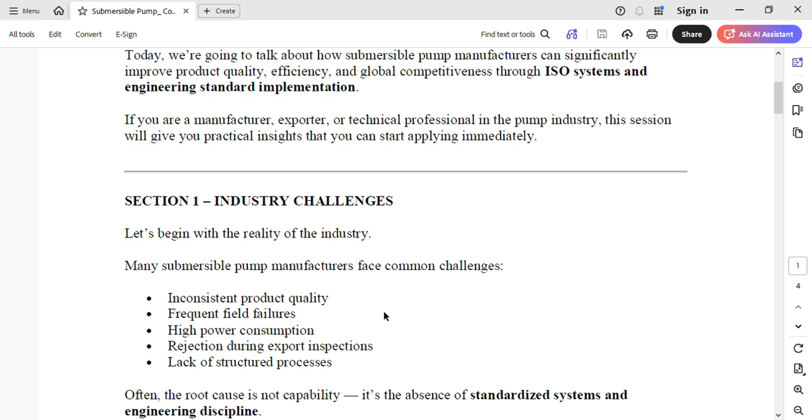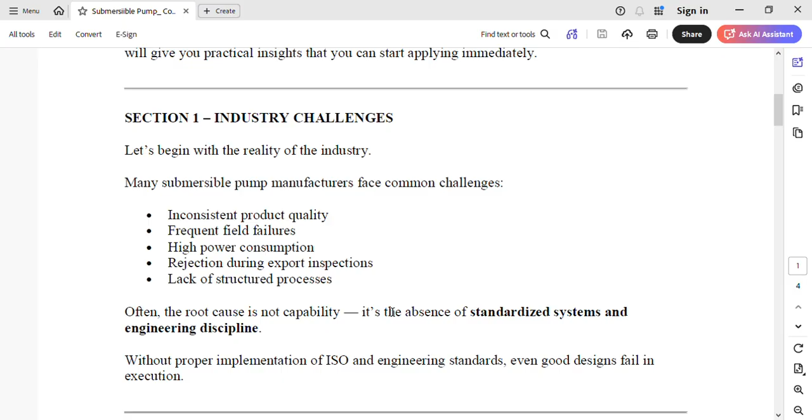Section 1, Industry Challenges. Let us begin with the reality of the industry. Many submersible pump manufacturers face common challenges: inconsistent product quality, frequent field failures, high power consumption, rejection during export inspections, lack of structured processes. Often the root cause is not capability, it is the absence of standardized systems and engineering discipline. Without proper implementation of ISO and engineering standards, even good designs fail in execution.

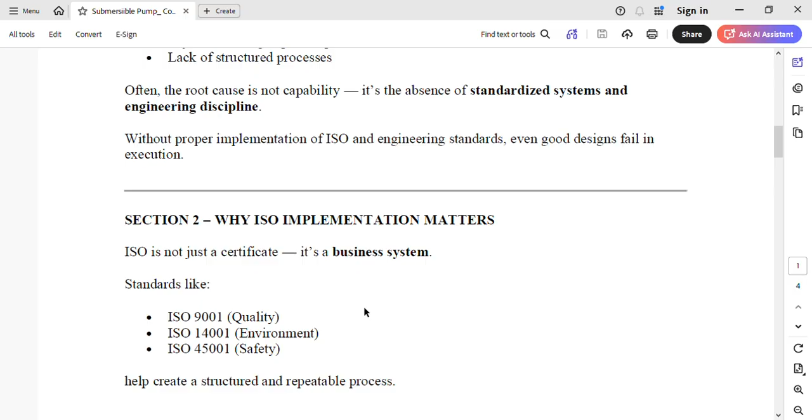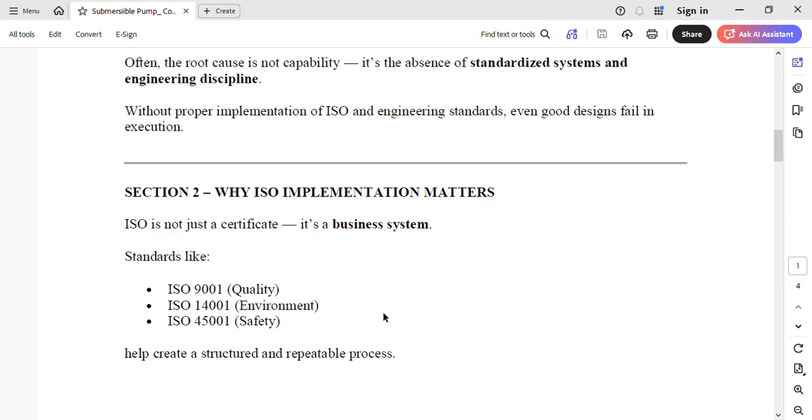Next is why ISO implementation matters. ISO is not just a certificate, it is a business system. Standards like ISO 9001 quality, ISO 14001 environment, ISO 45001 safety help create a structured and repeatable process. Key benefits include process consistency, reduced rejection and rework, better supplier control, improved customer confidence. For exporters, ISO compliance is often a market entry requirement.

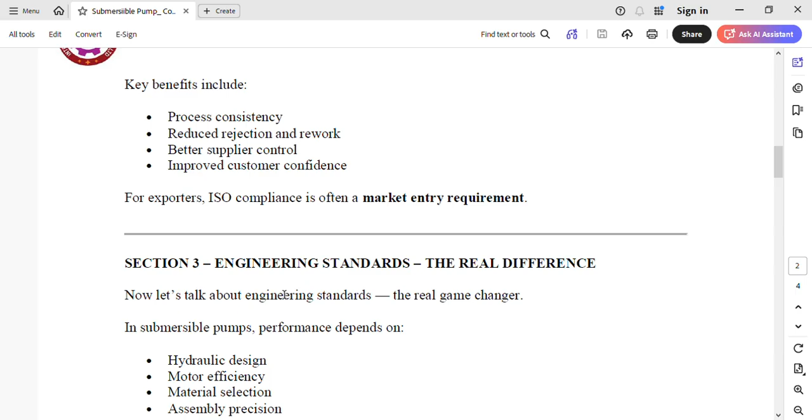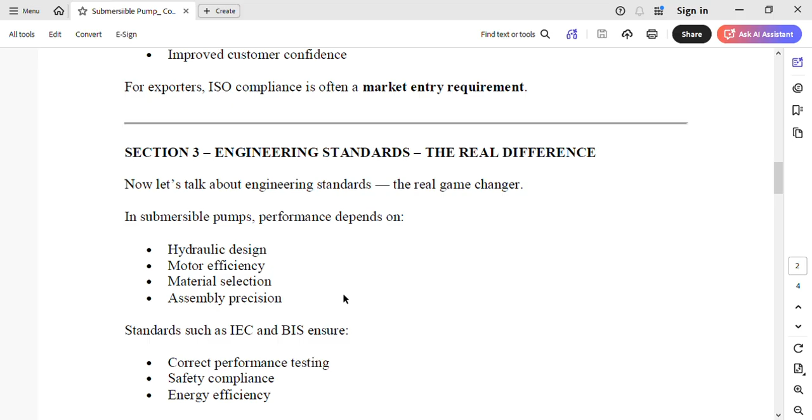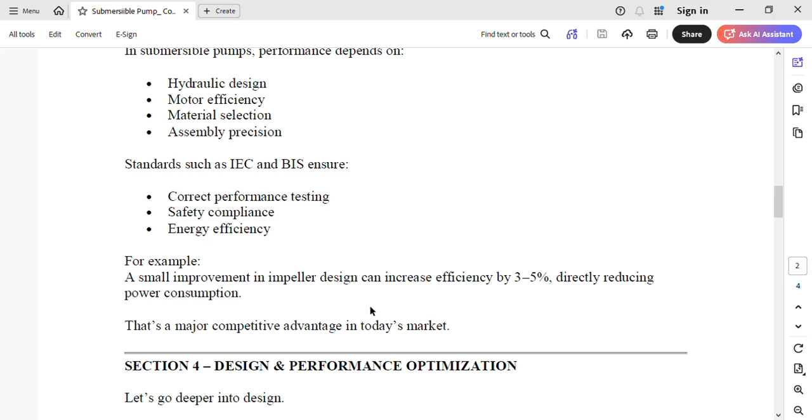The next is engineering standards, the real difference. Now let us talk about engineering standards, the real game changer. In submersible pumps, performance depends on hydraulic design, motor efficiency, material selection, assembly precision. Standards such as IEC and BIS ensure correct performance testing, safety compliance, energy efficiency. For example, a small improvement in impeller design can increase efficiency by 3 to 5%, directly reducing power consumption. This is a major competitive advantage in today's market.

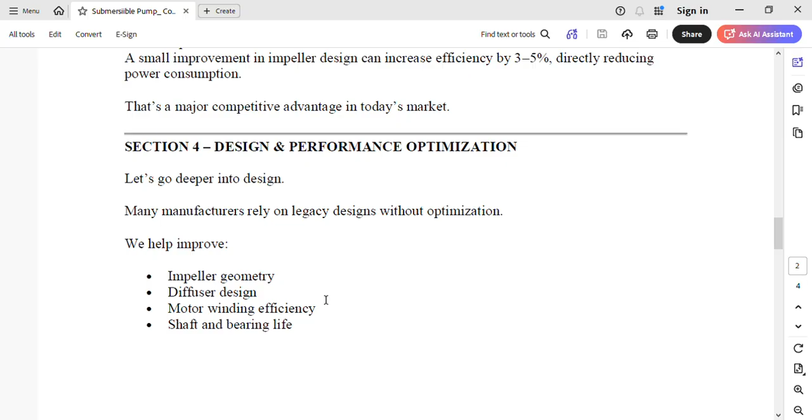Now, section 4, design and performance optimization. Let us go deeper into design. Many manufacturers rely on legacy designs without optimization. We help improve impeller geometry, diffuser design, motor winding efficiency, shaft and bearing life. We also conduct failure analysis to identify root causes such as dry running, voltage fluctuations, poor material quality. This leads to stronger, more reliable products.

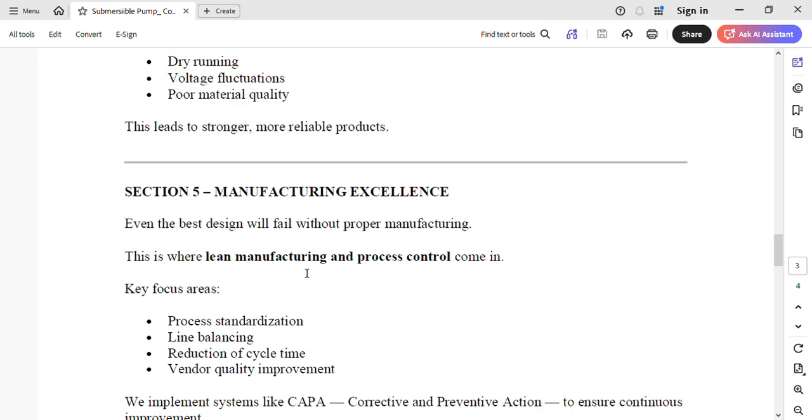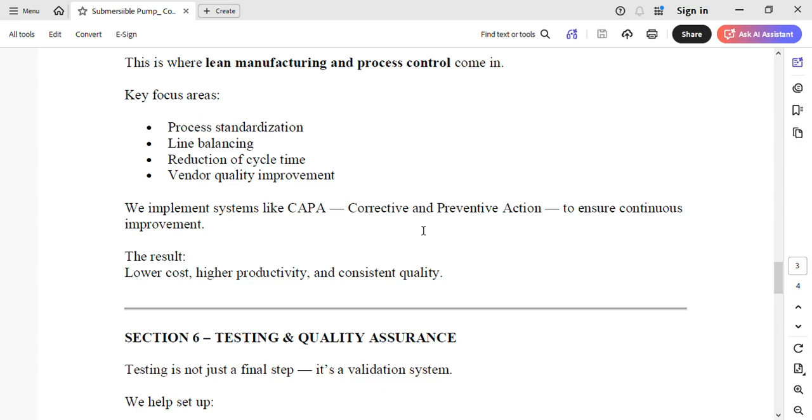Section 5, Manufacturing Excellence. Even the best design will fail without proper manufacturing. This is where lean manufacturing and process control come in. Key focus areas: process standardization, line balancing, reduction of cycle time, vendor quality improvement. We implement systems like CAPA, corrective and preventive action, to ensure continuous improvement. The result: lower cost, higher productivity, and consistent quality.

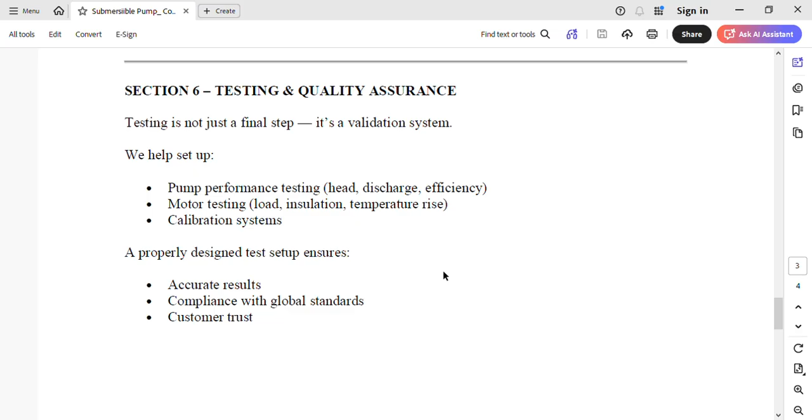Section 6, Testing and Quality Assurance. Testing is not just a final step, it is a validation system. We help set up pump performance testing (head, discharge, efficiency), motor testing, load, insulation, temperature rise, and calibration systems. A properly designed test setup ensures accurate results, compliance with global standards, and customer trust. We support companies in becoming export ready, enabling them to compete in markets like Africa, the Middle East, and Europe.

To summarize, success in the pump industry depends on three pillars. First, ISO systems, second, engineering standards, third, process excellence. If you implement these correctly, you will see better product performance, reduced failures, increased customer satisfaction, stronger global presence. If you are looking to transform your manufacturing setup, we are here to support you.